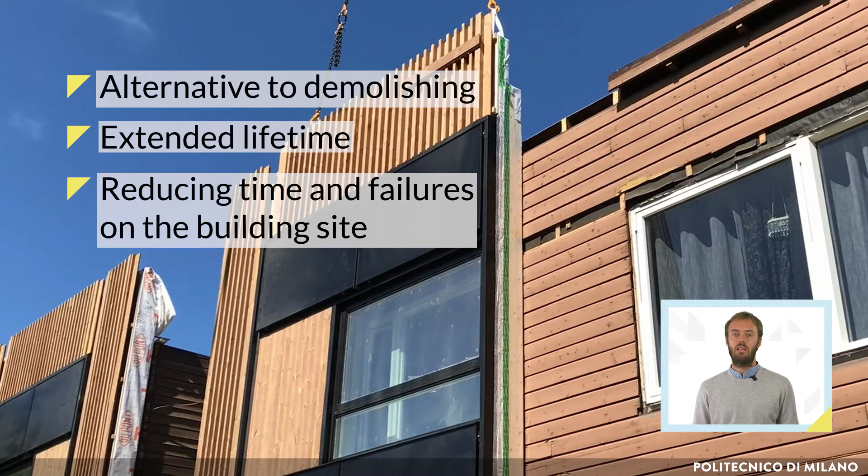The prefabricated multifunctional timber facade approach presents an alternative to demolishing and building new. This approach aims to give a new and extended life to the building. Reducing time and failures on the building site, achieving industrial quality standards in building construction, reducing lifetime cost and energy consumption of the building, and using renewable energy construction materials are the characteristics of the building system for modernization.

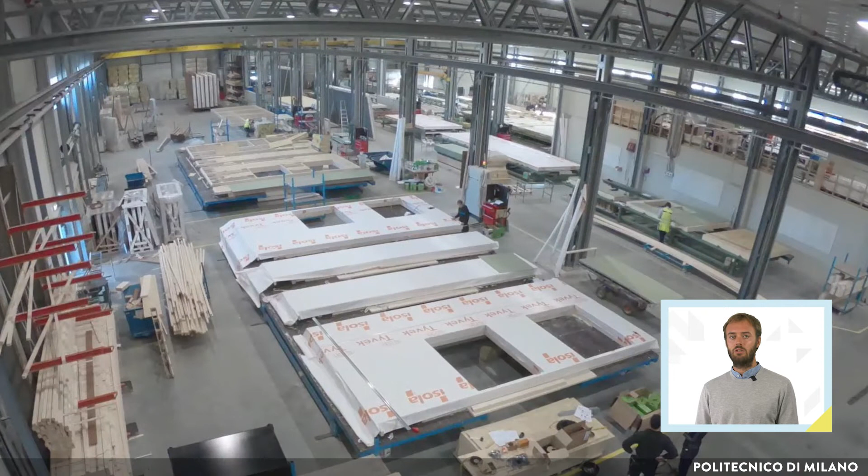To reduce drastically the working time on the building site and therefore reduce disturbance for occupants, it is crucial to move lots of passages from the building site to the factory, where most of the operations are performed in a controlled environment. Therefore, a maximized level of prefabrication ensures that all the details are solved off-site, within the planning process, and not later on the construction site. Of course, an integral planning team, which consists of architects, building physics and timber construction planners, and further specialized planners, is necessary in the building approach.

The first part of this process is the survey and the measurement to get as many details as possible about the existing building. Within this work, the load-bearing building parts are localized and their properties are analyzed. Especially, the deeper layers of the building have to be investigated, not only surfaces. If the existing structure cannot bear the loads of the new facade, it might be subject to reinforcement.

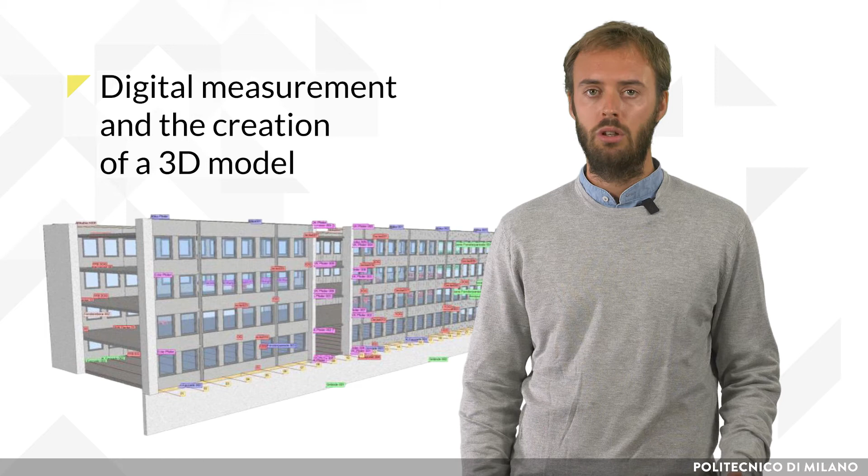The following steps in the planning are based on the digital measurement and the creation of a 3D model. In most cases, in fact, the planning documents for the existing building are inaccurate or not available at all. Furthermore, the building construction always deviates from the planning within the range of the usual tolerances. In order to capture precisely the existing building with its geometry and openings, a digital measurement is absolutely necessary.

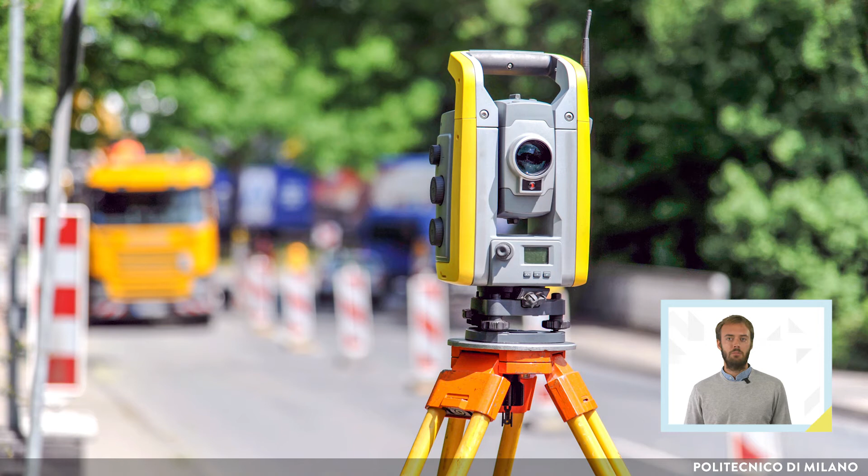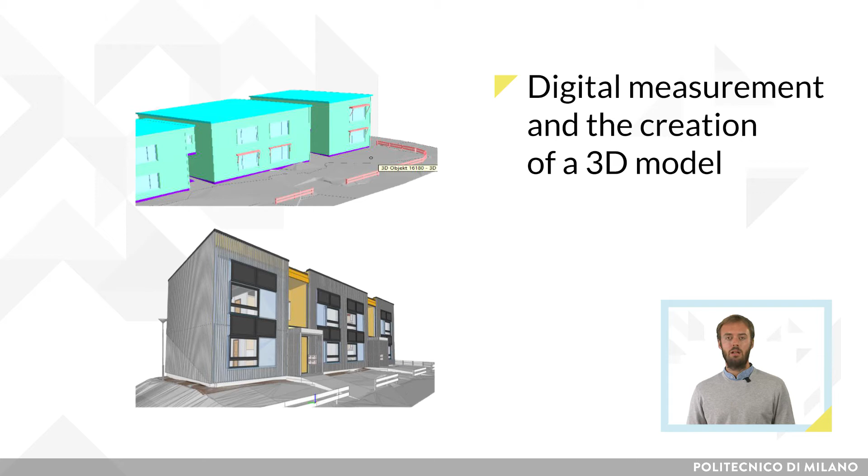The data for the measurement can be read directly into CAD or CAM software on site, or generated in a 3D model, or recorded by a surveyor. Typical measurement methods are tachymetry, photogrammetry or 3D laser scanning. An optimal result is achieved by combining these different measurement methods. For example, a measurement with a tachymeter can be used to record the most important points of the facade. The surface structure can then be read with the 3D laser scanning, and the point cloud can be linked with the information from the tachymeter to form a very good 3D model.

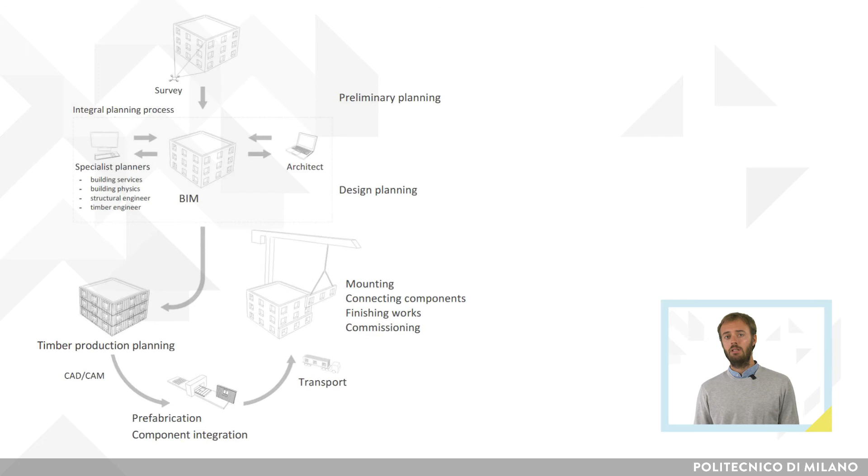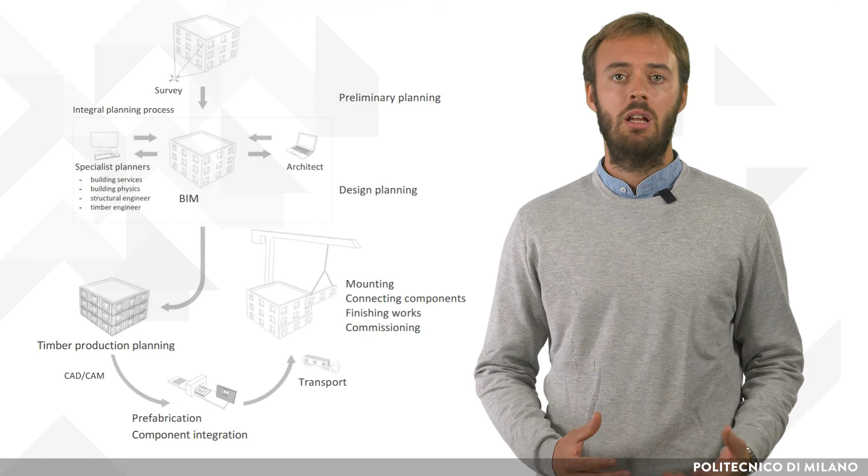It is very useful to create a connection between the survey and the timber planning. This can be done by interlinking the survey with the CAD/CAM planning software. In this way, the manufacturer can draw the existing building within his planning software, thus assuring a complete model which will be used for the timber production planning. All the tasks of the design planning will already make use of the building model, which was delivered by the survey. Working together on one model will enable the planners to be up to date about the current planning state, identify problems or discuss integration possibilities.

The retrofit approach, using the prefabricated multifunctional timber facade, features strong parallels to the BIM design and construction process. For this reason, the prefabricated facade approach's workflow fits perfectly with planning using building information modeling. There is a systematic digital workflow based on a 3D model, and there are many different planners and stakeholders within the process who have to coordinate and work together. Thanks to the 3D model, the timber elements will be tailored to fit the building exactly like a second skin.

The data of the timber construction planning will be used by the joinery computerized numerical control machine, and the manufacturing of the elements can begin. Once the module's dimensions are defined and the timber frame parts have been cut, they are assembled in the factory, adding main insulation and other layers, such as timber panels, membranes, cladding or the adaptation insulation layers, to complete the modules, as well as other technology components.

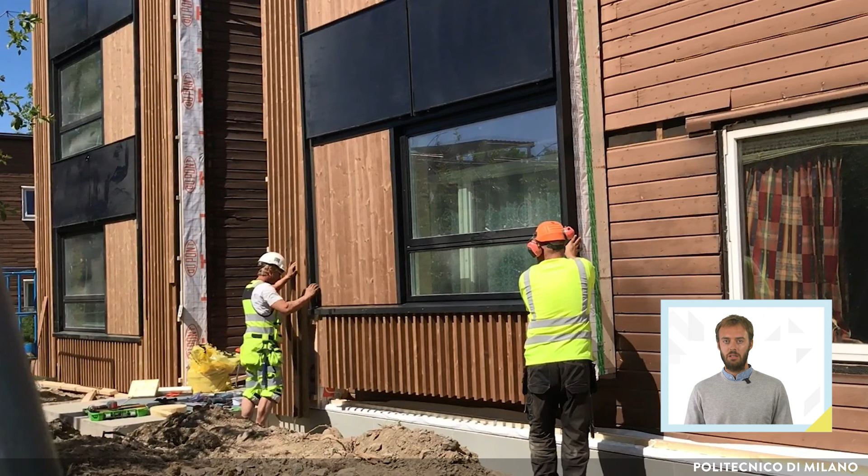After the manufacturing and assembling, modules are ready to be transported to the building site. Here, modules will be installed and anchored to the existing building with the use of cranes and/or scaffolding. Final operations will be needed to connect electrical components or other integrated technologies.